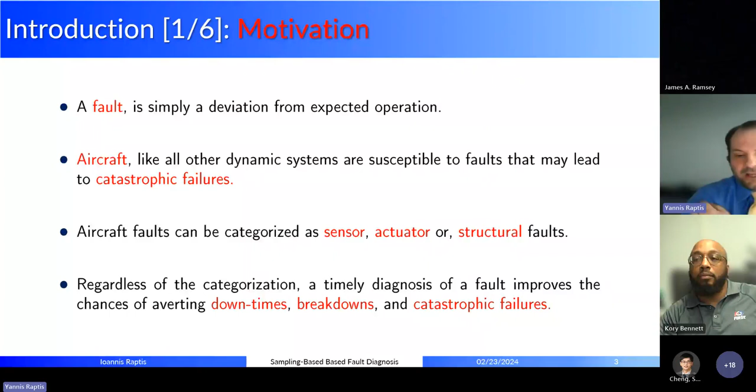Now, regardless of what fault you have, timely diagnosis can improve what we're looking for, which is averting downtimes, breakdowns, and catastrophic failures. Now, pretty much the idea for fault diagnosis is to have algorithms to replace as much as possible the redundancy of hardware, which is cost ineffective. And the idea is to promote algorithmic, software-driven solutions.

Now, our approach is classified as model-based. Why? Because we are using a mathematical description of the system at hand to determine the severity of the fault and define the fault itself. Model-based fault diagnosis techniques - it is an established method with well-known results.

Now, moving forward, we also introduce a sampling-based method, which is particularly suited for high-dimensional systems, and for ones that are subjected to high fault spaces. There are many fault modes, and aircraft, and in general aviation, is an application domain which is characterized by this necessity. So what I'm going to show you is how computation can be used in order to solve efficiently, and to the best extent possible, problems that would be else very analytically laborious to solve.

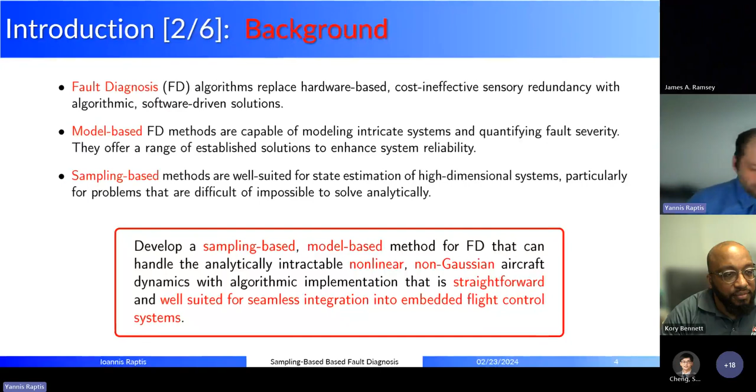So Vincent was patient enough to put together this very nice landscape of fault diagnosis techniques. As you can see, the main category is knowledge-based methods. This is what used to be referred to as the quote-unquote intelligent methods in the past. We're also having model-based, the most traditional approach, which is model-based methods. You may recognize the parity space, what used to be a popular technique, and the classical notions of parameter and state estimation.

As you have realized, in the last years, data-driven methods are here to stay, and pretty much data are substituting traditional physics-based and first principles models. So obviously you can perceive what I'm going to show you today is something more traditional - we're still going to see a nonlinear difference equation today, and we are sticking to our guns that models are still useful and perhaps necessary. Now, a little bit of a historical perspective.

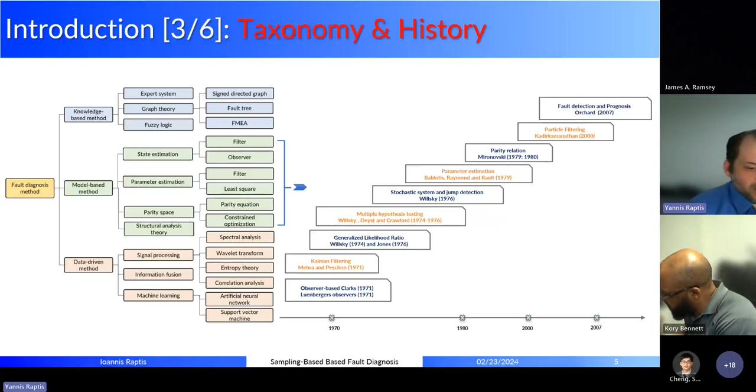Back in the early 70s, we have what is the Luenberger observers. These are observers directly suited for, they started for linear deterministic systems. This is a classical observer design that control engineers are aware of.

Now, the use of the Kalman filter for fault diagnosis first appeared by Mehra and Peschon, also in the early 70s. This is a paper that is difficult to find.

We had the first decision-making processes for fault diagnosis, and I'm going to emphasize the work of Willsky back in the mid-70s. Essentially, Willsky's work dominated the entire 70s. The major development, I would say in the 90s, was suboptimal filtering, in other words, particle filtering, becoming popular.

Another milestone, I would say, was the early 2000s, when there was a series of works by Kadirkamanathan that defined suboptimal estimation, in other words what is well known as the particle filter, to be used for the purpose of fault detection and identification.

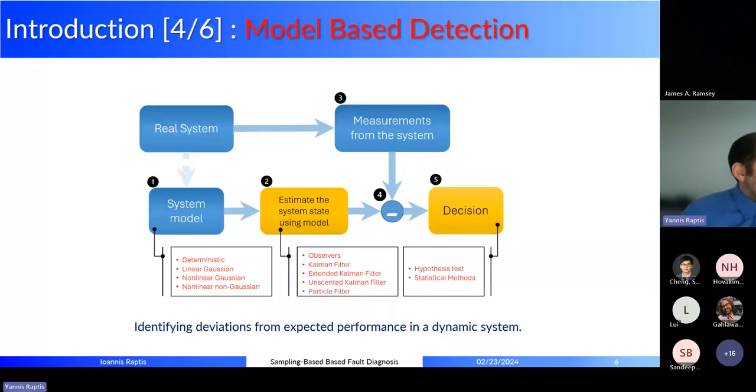So this is another part of fault detection and identification. It is decision theory, for which we make a decision whether or not a fault is present, and if we consider a fault being present, what is the cost of our choice if we are wrong, for example.

So traditionally, when it comes to model-based techniques, the most common architecture when we are dealing with multiple fault modes is to have what we call the bank of estimators. Pretty much, essentially, you're making an estimation, and if there are, for example, lowercase n fault modes, for each of these you're running an estimation.

You're estimating the state of your system at every time step for all of these fault modes. And for all of these estimates, you do some sort of test of whether it's more likely to have a fault compared to the healthy, no-fault operation. Then based on this test, you're making a decision.

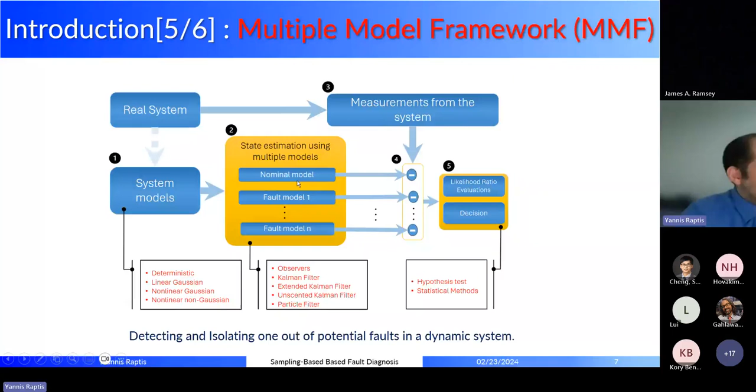So this is where we're coming into play. We want to substitute this process of a bank of estimators with another mechanism, which we have established is more computationally tractable. We're saving in terms of computation, and at the same time it elegantly provides reliable results.

It also provides reliable FDI, fault detection and identification, results. So what we are using as our estimator today...

You're going to see a variant of a particle filter. So even though we're talking about detection and identification, the main core of our work is an estimation technique.

We are doing this modification in order to be efficient in terms of computation, and at the same time having an informed manner that makes sense when it comes to figuring out if a fault mode is present, or in another possible feature, if multiple fault modes are simultaneously present, which in general multi-model hypothesis testing is limited to only one active hypothesis being present.

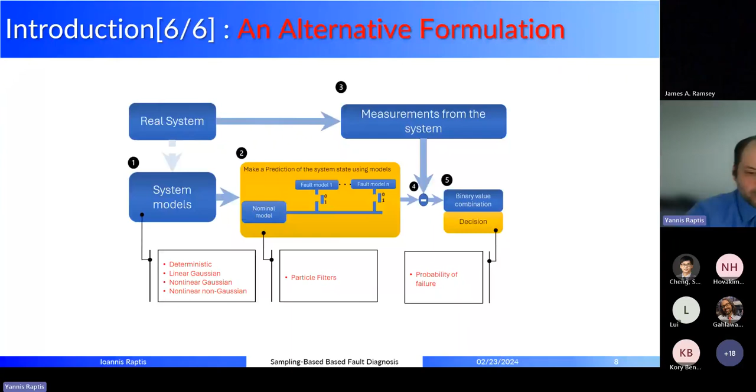I need to emphasize that compared to other methods, and of course there is not one global approach, this is not a method about identifying the presence of an exogenous signal or some type of determining residual. This is about figuring out changes in the dynamics of your system. Perhaps one shortcoming of our approach is that we are expecting the fault dynamics to be known so far. We're still working on bypassing this limitation. So you need to have a nominal model in our technique, and we're arguing that if you do not have an exact model, then you better do well in the presence of model uncertainty.

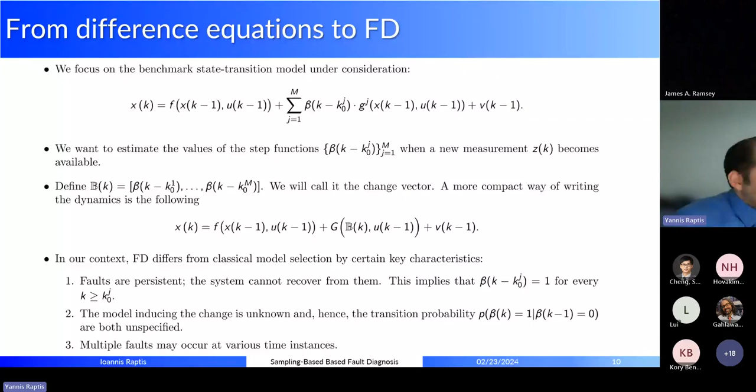Let me give you a discrete event viewpoint, because sometimes fault diagnosis in this context is done from the focal point of discrete event systems. So assume, based on the description I just gave you, that we have uppercase M fault modes.

Considering that we can have multiple faults occurring from a discrete event viewpoint, the math is very easy: you may have 2 to the M possible states. Keep in mind that this is essentially taking the k combinations for all k, where the number of elements is uppercase M.

The combination of M with 0 corresponds to the healthy state. To give you an illustrative example, if you consider 3 fault modes, you end up with 8 states.

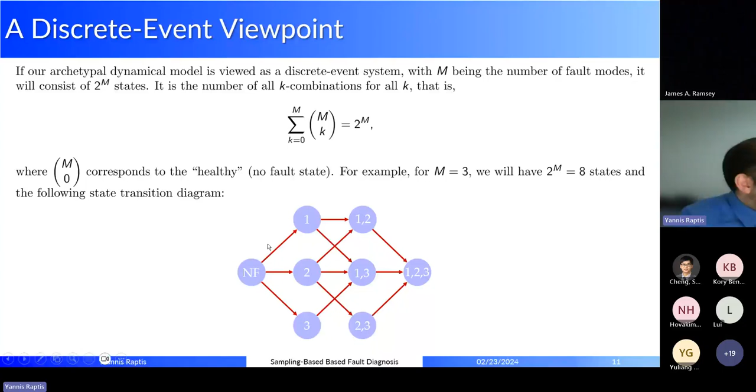As you can see, the number of states increases dramatically, geometrically, with the number of fault modes. So let's look at the discrete event transition going from the non-fault state. We always consider ourselves starting from the no-fault state, and then one fault may occur, then a second may appear, and then a third may happen.

Now let me give you another viewpoint. That was a discrete event viewpoint. Now I'm going to show you another one. The reason I'm sacrificing time to show you all these different viewpoints is that they forged the development of our own methodology. So consider the case.

This is another classical problem, again mostly in control systems and in signal processing. Consider that we're trying to figure out which of the lowercase m models, of lowercase m plus 1 models, occurs based on noise-infested measurements. The index h equals 0 - actually it shouldn't be h, it should be j, I apologize for the typo.

The case for j equals 0 corresponds to what we refer to as the healthy model, while the rest of the lowercase m indexes represent the dynamics, the model that corresponds to a fault mode.

Pretty much what we need to figure out is to obtain an estimate of the state at every time step, and then conduct some sort of test for all of the possible models, to detect a shift or a jump in the dynamics.

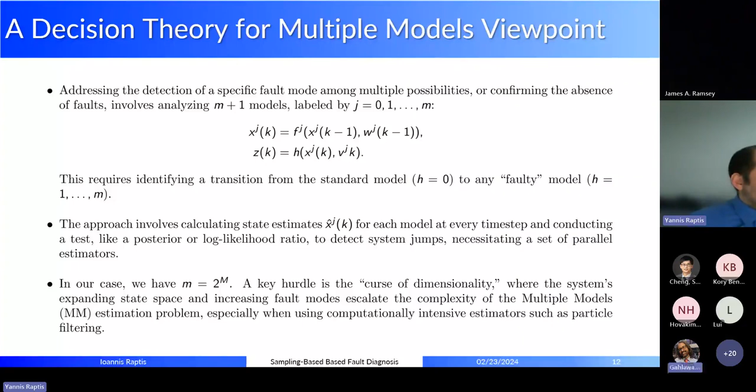Now there is a fourth perspective: the perspective of parameter estimation. You may consider any type of, in the case of dual parameter and state estimation, an unknown vector theta for which you would like to obtain an estimate of its value.

In the realm of parameter estimation, and in general in sequential Bayesian methods, a common approach is to augment the parameter vector into the state dynamics. In other words, create a new state for your parameter vector, whose state transition model is represented by a Gaussian random walk.

The obvious idea is to treat what we refer to as the change vector - if you remember this bold B vector - as a parameter vector, but there are a few shortcomings in that approach.

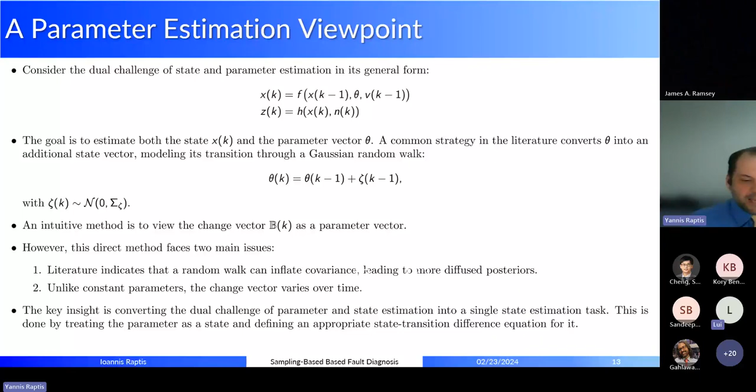This is done by treating the parameter, as I mentioned, as a state vector, and then defining a state transition. So this is definitely something useful to use - make your fault detection problem into an estimation problem. Make something that provides both of these. Make a filter that supplies you with both of these tasks.

So a little bit on particle filters. I'm not going to invest much time because I'm going to show you how the standard particle filter is laid out, through the lens of fault diagnosis. So you'll see how, if you are not familiar with the particle filter, how it works, how the standard configuration is taking place.

So pretty much the idea, this is a classical structure for Bayesian, for sequential Bayesian estimation. You're having a prior probability, you're having the likelihood, this is coming from your data, this is a PDF coming from your data, and you would like to obtain a posterior. Now the posterior probabilities are continuous, multidimensional, and typically you're dealing with nonlinear and non-Gaussian systems. So what do we do?

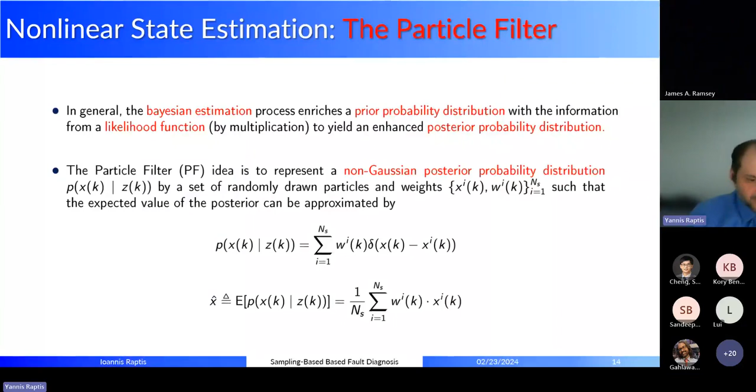We approximate them with discrete PDFs represented by a set of what we call particles and their respective weights, and we are updating these discrete PDFs using special sampling techniques to handle the transition from prior to posterior sequentially, and in a manner that's going to provide us reliable results.

So just to give you an idea, a standard estimation algorithm in general consists of two basic steps: the prediction and the correction. If you see a breakdown of my algorithm, the particle update corresponds to the classical prediction step. You predict, then you correct with the data. This is what we call the weights update portion.

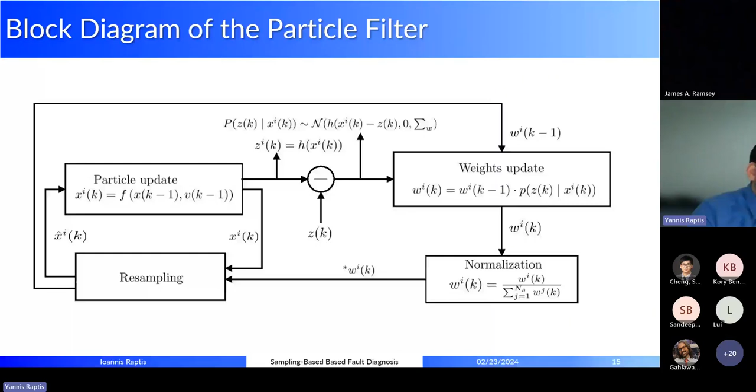And there is an additional part which is really important, having to do with the computational aspects of particle filters. Keep in mind that particle filters are suboptimal solutions and approximations invented to solve analytically complex problems. So we needed to do something computational - a computational intervention to make sure these algorithms' performance is not going to deteriorate.

So what I'm going to show you is a dual method designed for fault diagnosis, which creates a state estimator, or what we refer to as a filter, which has a dual purpose: state estimation and fault detection and identification.

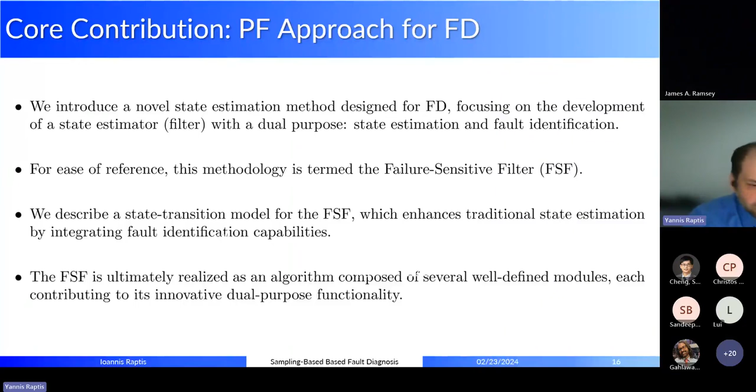So for ease of reference, I'm going to call this special estimator the failure sensitive filter. We're going to start by describing how the state transition, how we should build this filter. The manifestation of this filter is an algorithm that's supposed to process information coming from the actual process. At the end of the day it's going to be broken down into distinct steps. So what is the state of my FSF?

Well, I'm going to combine a continuous value, the state, which aspires to estimate my system dynamics, and also I'm going to introduce a binary transition mechanism. Consider uppercase M binary states, which are updated, which have their own difference equation.

Each of them is supposed to estimate the value of the change detection vector. So the collection of my binary states, I'm going to call it calligraphic B, which is tasked to estimate what I used to call the change vector, which was the bolded B. And essentially, the statistical inference of the calligraphic B binary states is going to yield an estimate of the change vector.

Now, because by definition the binary states are binary, and at the same time I'm having continuous valued states replicating the dynamics of my monolithic process, by definition this is a hybrid filter. And because I'm going to use a very special way to evolve the binary states, it's going to end up being a non-Gaussian filter. The reason I emphasize this being non-Gaussian is that the bootstrap particle filter, what I'm going to end up using, is so versatile it can handle non-Gaussian noise.

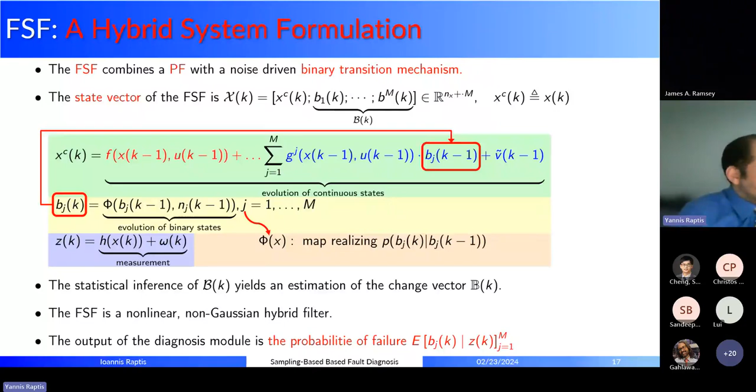Remember that the binary states were introduced in the first place to do some sort of parameter estimation of the change detection vector. It's a specialized way of doing that. Let's get started with first understanding how the state transition model of the faults works.

I'm going to do a model that I think makes sense. According to this model, if at time instant k minus 1 your system was healthy, there is a high probability eta that you're going to remain healthy, and 1 minus eta that you're going to transition to a faulty state. Obviously the value of eta is unknown. I don't know what causes this, but there exists a probability for which my step function transitions from 0 to 1, unknown. But I can model it this way, and it's a plausible approach.

Now, if your state is 1, you're going to remain at 1 with probability 1. So it's certain that if your fault occurs, it's going to stay there. Your system cannot self-heal. Let's assume this is not a very restrictive assumption, that in general eta is going to most likely have a high value. Things don't break that easily. This is not going to take any role at all in my design.

So somehow I need to also have a state transition PDF for my binary states that replicates the aforementioned distribution I told you about the change detection vector. I would like to make this random sampling map, this function phi, that at the end of the day performs a simulation. It simulates - you treat the binary vector, I'm sorry, the binary state as a random variable, and this function phi is designed to guarantee that your transition PDF for the binary states celebrates certain properties.

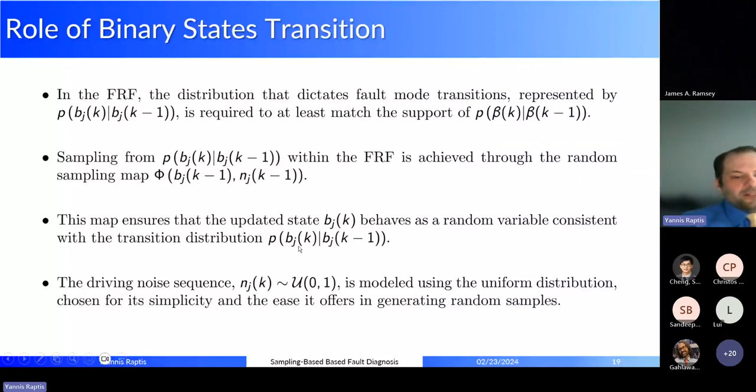Now, because I'm going to be generating, going to be simulating - in other words, drawing random numbers - in order to design my phi, I'm going to use uniform noise from 0 to 1, because that's the easiest thing to draw samples from. The idea is that the state transition PDF of the binary states is going to have at least the same structure with the same support. Support means that it is non-zero when my desired PDF is non-zero. They do not have to be the same.

So what I do is just draw a random number from 0 to 1. If my previous state is healthy, and the random number that I draw is less than a value eta tilde, then I set my new state equal to 0. Otherwise, I set my new state equal to 1. This is a very easy way to show that the updated state is a random variable, and it follows the same structure, the same model as what I just showed you here.

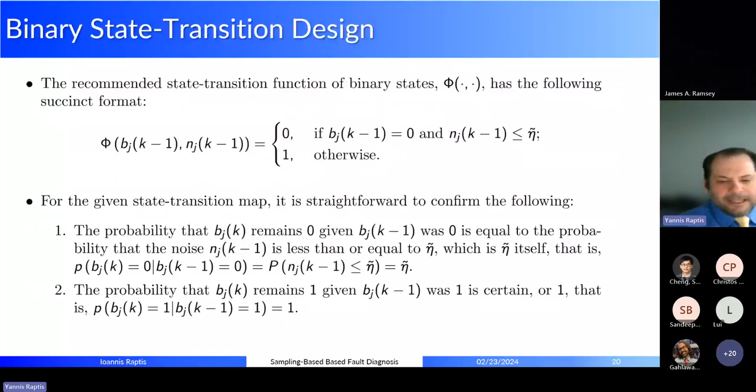The only difference is that because I do not know eta, it is substituted by eta tilde. This is a designer's parameter, which I'm going to comment on. A value of eta tilde equal to 0.5 means the designer's belief is that there is equal likelihood to be faulty or healthy at the next time step.

Essentially, the design of phi wants to provide an ergonomic means of maintaining the binary state as random variables and seamlessly integrate them into the difference equation. I just want to introduce a difference equation which replicates the simulation of a state transition PDF according to my likings, and this is the case.

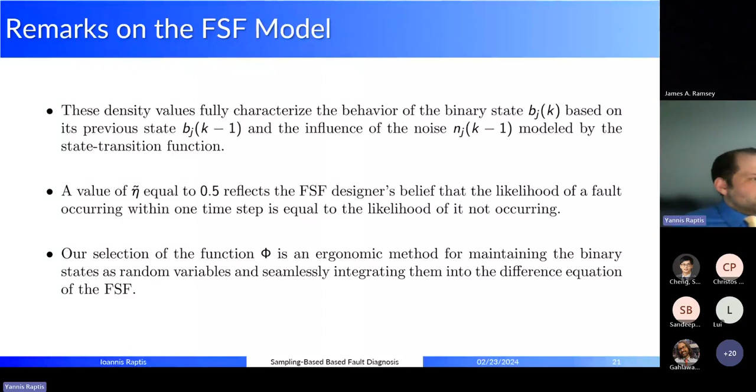So how to select tilde eta - you don't have to be accurate when it comes to this, but a fair assumption is to think that in general it's not very likely for a fault to happen. I'm going to show you in detail how things work.

How does my particle filtering operate? I'm going to take the basic structure of the particle filtering, use the model of the FSF that I just introduced, and show you step by step how you can provide inference about the occurrence, or make a decision about the occurrence, of a fault mode.

In the beginning, you draw N samples from, for example, a Gaussian PDF, and this is your pre-assumption about your initial state. It doesn't have to be accurate, but it helps. All of these, what we call particles, are going to be assigned an equal weight. Remember, at the end of the day, what we are doing is updating a posterior PDF, which is represented by particles and weights. It's a discrete multi-dimensional PDF. So I'm just drawing N particles from my initial belief of where my state starts.

I can use a Gaussian distribution whose mean and variance give me some sort of confidence of where my system starts. And I'm obviously assuming that all of the particles are healthy.

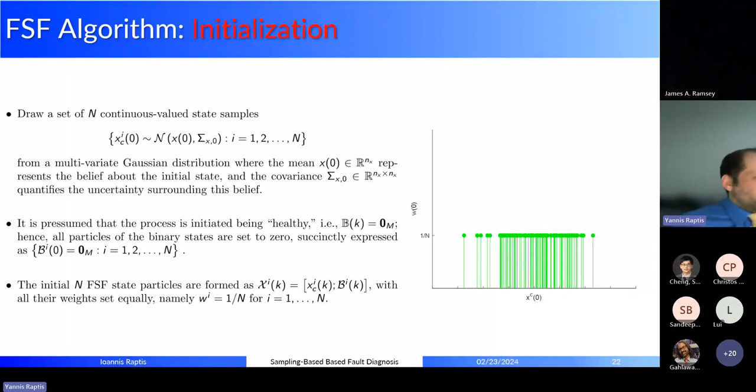In the following graphs on the right hand of your screen, it shows a one-dimensional example. In this illustration, I'm using a one-dimensional state, meaning the continuous value dynamics have only a single dimension. Green markers represent healthy particles, while red markers represent faulty particles.

And what do I do? When it comes to the sequential execution, we have the state prediction step, or the particle update. This is where you use your knowledge of the model dynamics in order to progress the state of your system.

I want to make the comment that I design phi with the following qualitative guideline in mind: I would like my phi at every time step to retain the exploratory nature of the binary state. In other words, I wanted the transition to produce a small number of particles that explore what we call the other side. For example, I would like 10% of my particles to also entertain the idea that there might be a fault in the system.

How many of these end up transitioning is a design parameter. For cases with high signal to noise, you can explore more, but for low signal to noise ratios, exploring too much is a bad thing because the PDFs overlap, so you're giving too much emphasis to things you shouldn't have. But again, these are cases that are difficult in general for estimation.

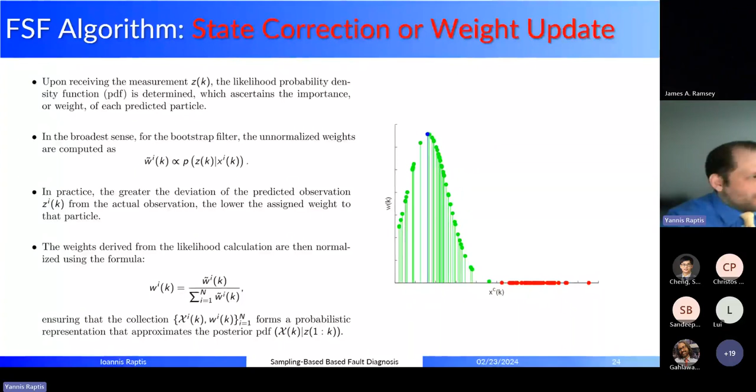An important part of the process is called resampling. What's happening is that in certain cases, as you can see here with the red states, which correspond to faulty particles, you end up having particles with negligible weights. This is very common in particle filtering. When you sequentially recycle them through your algorithm, they cause extreme degeneracy to your filter.

So long story short, the resampling essentially cancels out particles with low weights and replicates particles with high weights in an informed manner. This ensures that at the end of each execution, there is a modality that eliminates whatever is garbage—particles that don't contribute at all to the description of your PDF.

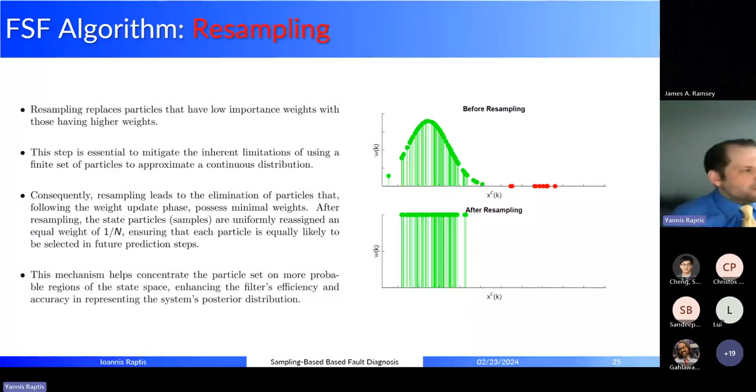This resampling approach exemplifies the association of particle filters with genetic algorithms, because it has this survival-of-the-fittest sort of approach.

So at the end, we're having the decision. The decision is that you're getting an estimate of your binary states, which are going to have a value from 0 to 1.

Obviously, the closer you are to 1, the higher the chances that a fault may occur. So you define a threshold, let's call it alpha, for which when your binary state, the estimate of the mean of your binary state, exceeds this value, then you can trigger a fault alarm. Now, the selection of this value alpha is debatable, and it has to do with many terms.

It has to do with the noise level. It has to do with the degree of separation between the faults and the nominal modes, because in the case that they overlap, when the modes and the health dynamics overlap, this is going to make your life difficult in distinguishing them, but this is a general challenge.

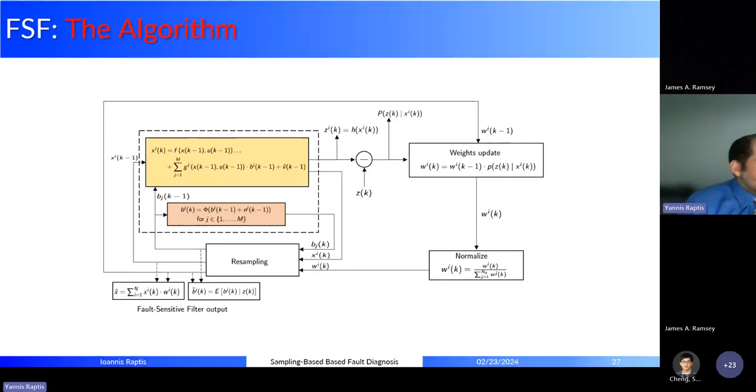Now this is the macroscopic view of our algorithm. Essentially, it is a bootstrap particle filter, as it's called, the most fundamental form of the particle filter. It has exactly the same structure as a particle filter, but it provides fault detection and identification.

So I'm not going to spend a lot of time on the results, just a case study. We're having the quadcopter, 12 states, and the fault under consideration is loss in the efficiency of the thrust. The force under consideration is we're having 4 thrust vectors, and we can model the loss in efficiency. In other words, we do not produce as much thrust as you want.

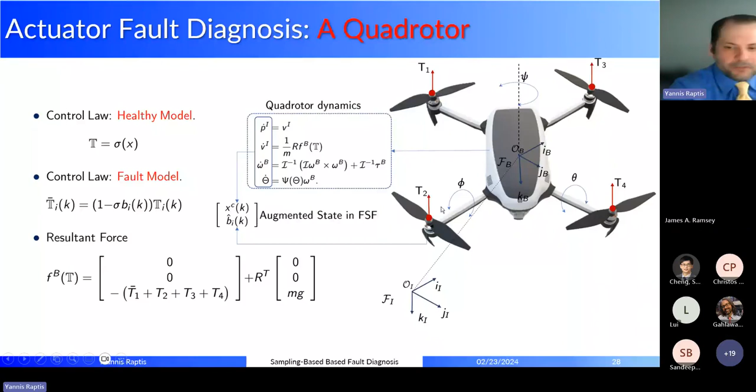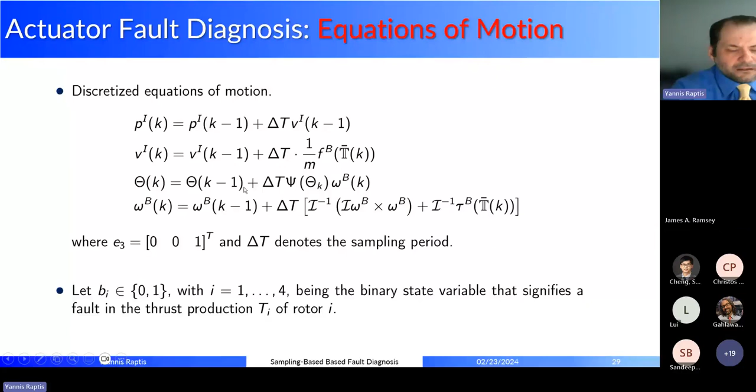So in your continuous valued state, in your FSF filter, you're going to put the 12 state motion variables of the quadcopter. And you're going to also introduce 4 binary variables, each representing a loss in the thrust of one of the rotors. Again, we need to discretize the state equations. Okay, this is how it's going to look like, the block diagram, how this can be applied.

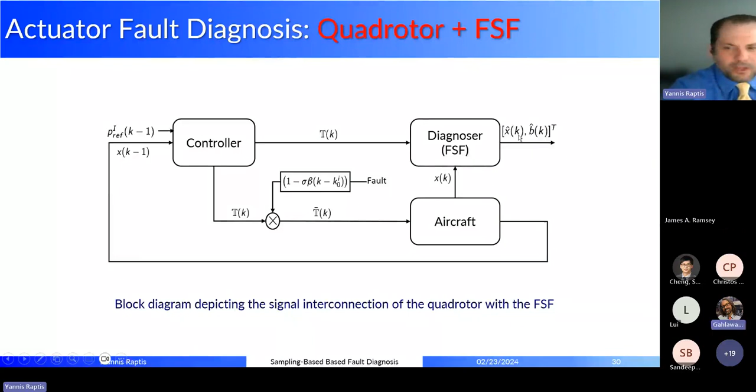We end up having the controller. Then there is another modality, the diagnoser, that takes the aircraft dynamics and also the thrust vector, which is the control signal. The fault is injected, and we are making a decision at the end of the day. The decision is dual, so we're having a dual estimate of the state and also these binary states, which help in making a decision whether or not a fault is present.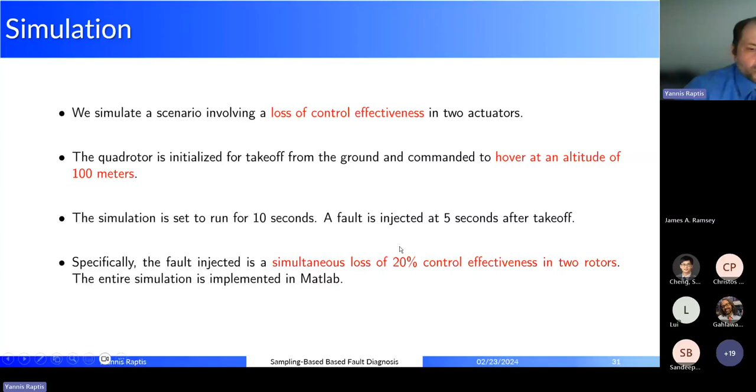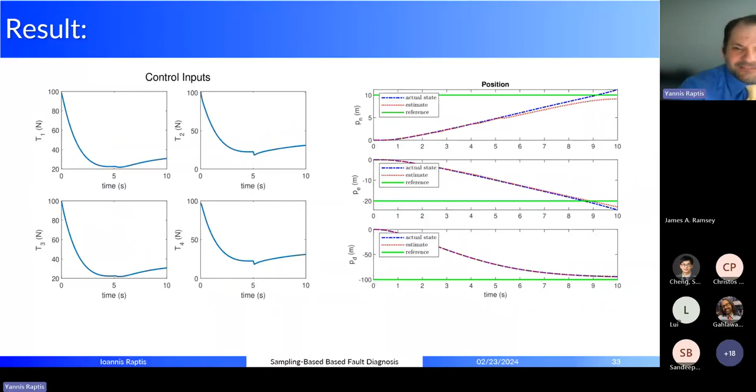identified the fault. A little bit of how the thrusts look like. Those little teeth, those little discrepancies, are supposed to be the loss of efficiency. We also are having how the position looks like. Those are the estimated and the actual states. I mean, obviously, there's going to be a difference. Remember that the important thing is the identification part, it's not the estimation part.

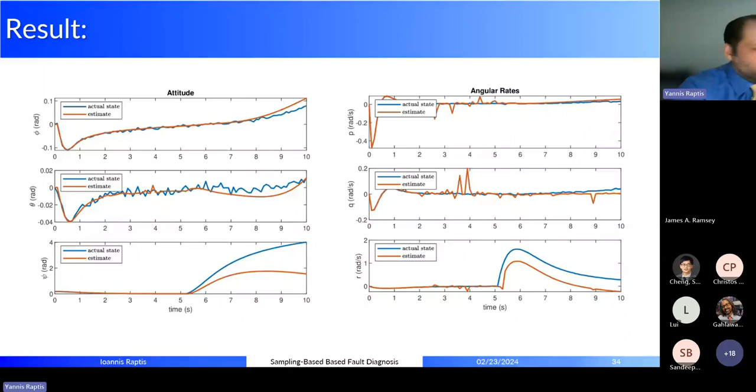So, what I presented you today, and I know that my time is up, so I don't want to abuse your schedule. So there's a hybrid system formulation. I'm having continuous valued dynamics, and I'm introducing binary states that signify faults. And the idea is to streamline the identification when we are dealing with concurrently occurring fault modes.

This approach eliminates the need for a bank of estimators, making our estimation problem for fault diagnosis much more efficient in terms of computation. And finally, one of the things that we find appealing is that it is very well suited for real-world integration. So it doesn't require nonlinear inversion or some sort of analytical laborious process. Essentially, the only thing you have to do is sample in your embedded system and just update your state.

Now, I just want to make this last remark. Obviously, sampling was always important, but I believe in the last 15 years, sampling and the use of samples to approximate and provide solutions to intractable problems is becoming extremely popular. Whether it's motion planning or path integral control, sampling is proven to be...

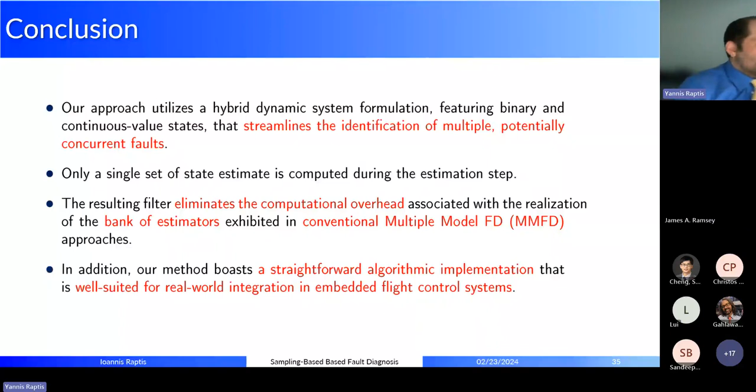I just want to comment on the convenience of particle filters to make predictions. Essentially you recycle your trajectory through the model dynamics, and you can conveniently quantify the uncertainty, approximate the uncertainty of these PDFs, through this discrete PDF approximation that the particles and their weights provide.

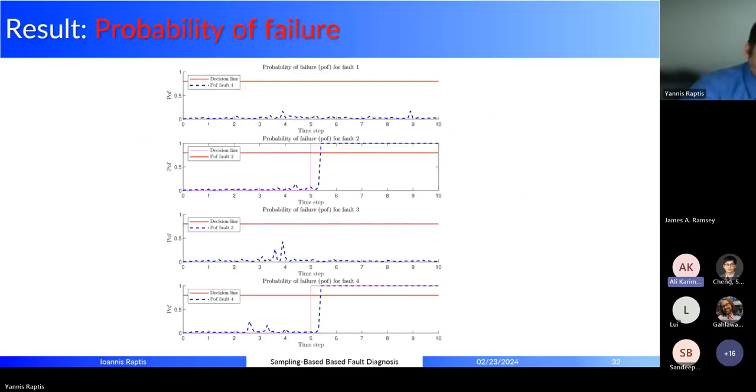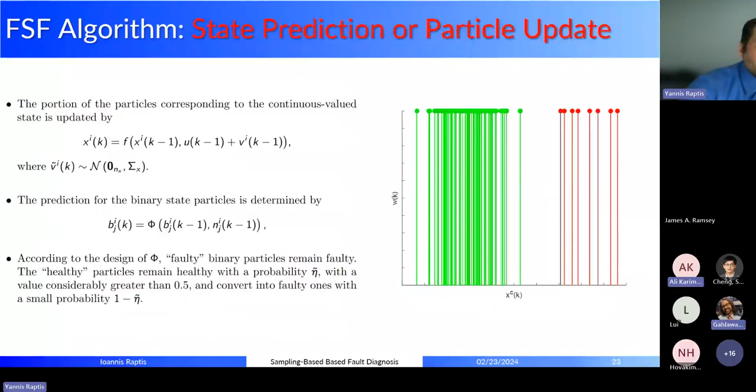Thank you, Ioannis. This is Ali. Could you go to the slide where you were talking about the limitations and make more comments on that part, or you didn't grab that aspect? Do you by any chance remember that slide? I can provide you a list of limitations right now. Okay, yes, that might be easier, yes.

The number one thing we've been receiving a lot of heat about, especially these days, is the use of first principle models of state transition PDFs. Everything is geared towards model-free versions and approximations based on data. The number two issue, which always existed, is the computational intensity of the particle filters. If you want a good estimate, you need a large number of particles, which has been heavily criticized through the years, but it is difficult in certain cases to obtain real-time, reliable solutions. I would argue in response to this criticism that that's the price we pay in order to have brute computation substitute for difficult analytical problems.

And finally, one other shortcoming perhaps is the large variances that particle filters are subjected to. That's not a small thing, obviously, especially when the number of particles decreases. So this is what I would say would be a summary of shortcomings, to my mind, at least.